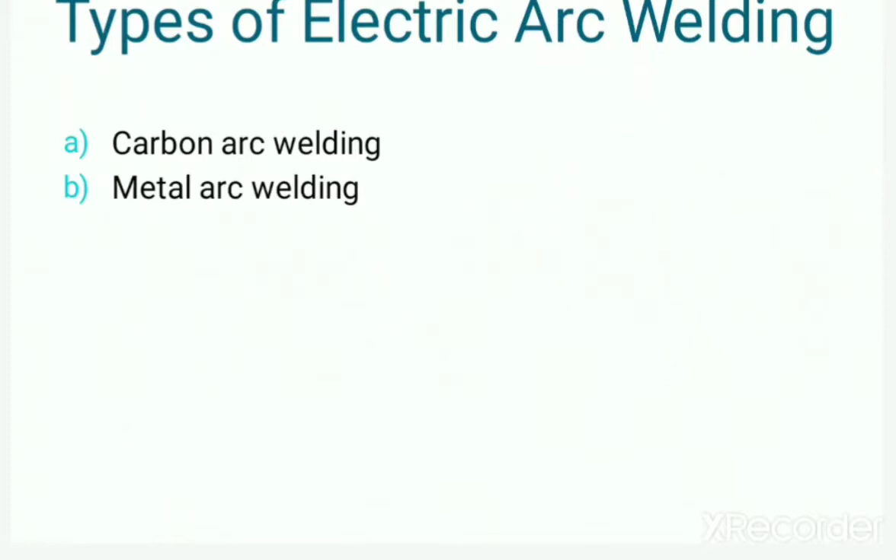Now in between the metal and the electrode, this arc is produced. That is what we are talking about, that an arc is produced either between the electrode and the metal piece you have to weld, or between two electrodes. Here the arc is developed between the electrode and the base metal which you are welding.

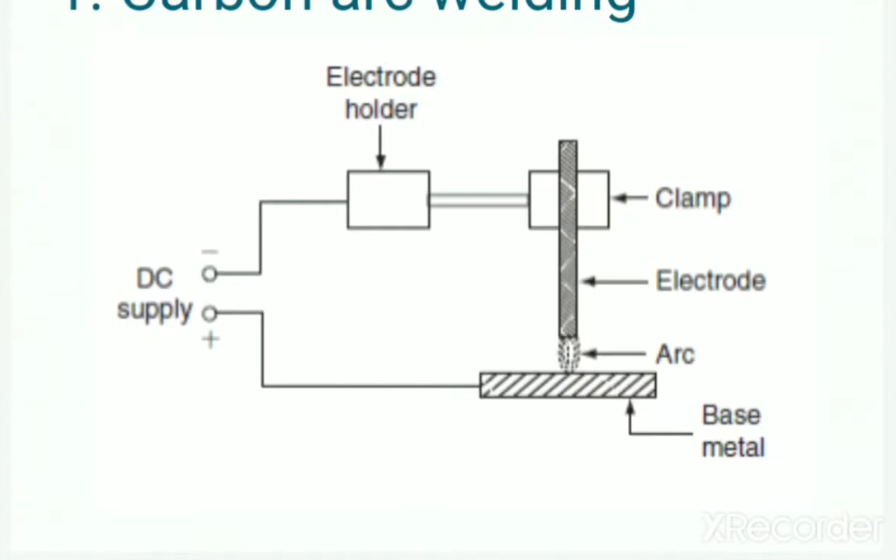When the arc is produced, it will melt the base metal, the electrode will also get melted and will spread over the base metal uniformly, because it is in liquid form, and once it gets cooled after the arc is removed, it will make the base metal much stronger, and the welding is done accordingly.

Now in carbon arc welding we can do the welding in two ways, for lighter metals and for heavier welding. If we are doing heavy welding, the size of the electrode is around 25 mm diameter and the current is around 800 ampere. Whereas if we are doing very light welding, the size of the electrode is only 10 mm, and the current is only 300 to 400 ampere.

Because the heat produced is very high, this kind of welding is used for copper welding, as copper has a very high thermal conductivity. So remember this, just because copper has a very high thermal conductivity, normally carbon arc welding is used for copper welding. We have already learned this in the last lecture also.

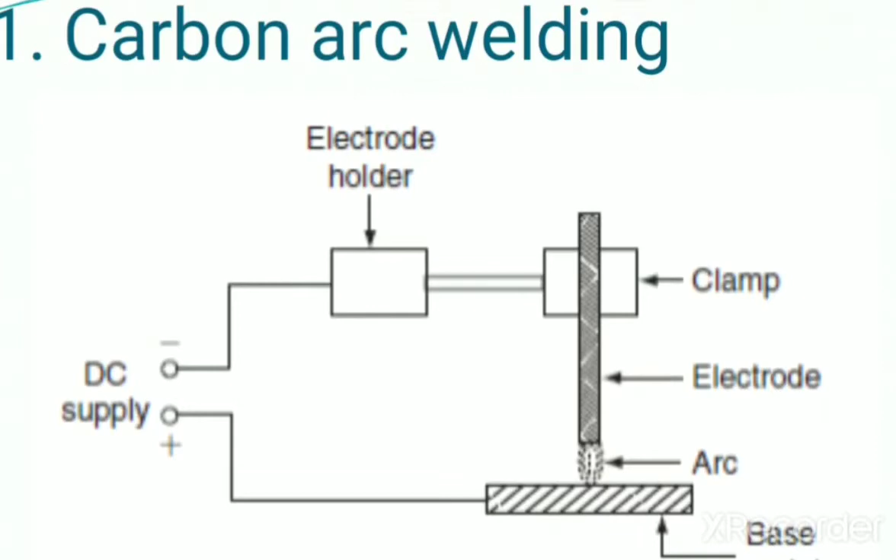Now next is metal arc welding. See, the process is the same. In metal arc welding, you can see here either we can use an AC supply or a DC supply. That depends on what kind of material you are using to weld. Clear? Now see, again here is an electrode holder.

This electrode holder is holding the electrode. There is a deposited metal also, always remember. And a flux coated metal electrode is here. This is the base metal or workpiece, where you have to weld. So this is the metal which you have to weld.

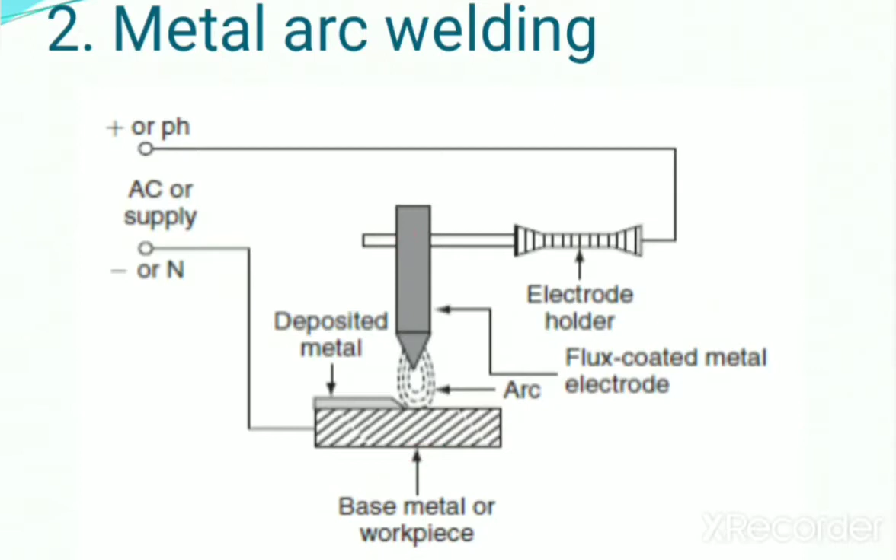Now when an arc is produced in between the electrode and the metal piece, what is going to happen? You can see the deposited material is here. So what will happen? As an arc is produced, this metal will definitely melt, and this will spread over the workpiece which you have to weld.

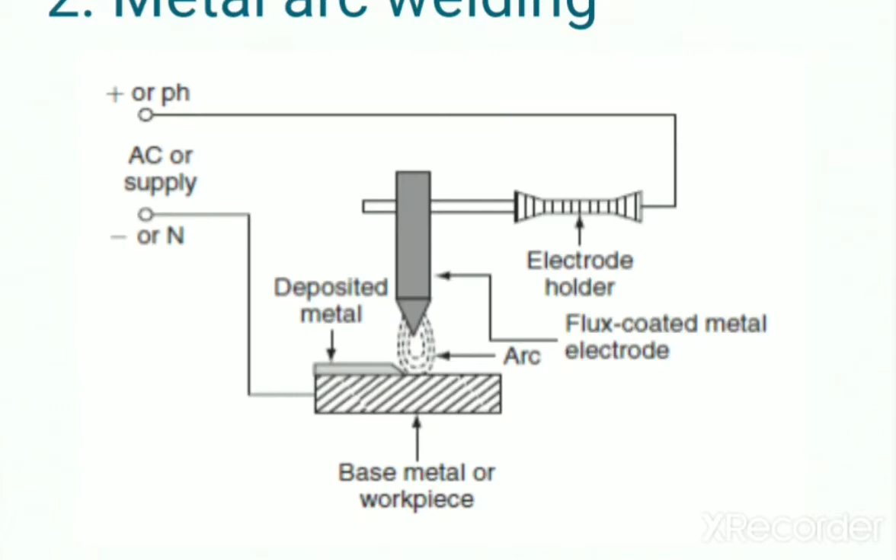So this deposited metal will help in doing the welding, and the electrode is helping in producing an arc. Okay, so this is all about metal arc welding. Metal arc welding is further subdivided into two parts: bare metal arc welding and coated metal or shielded metal arc welding.

In case of bare metal arc welding, I just want to tell you one thing: the welding is open to atmosphere. That means the metal which you are welding is open to atmosphere. So when you are welding, it is open to oxidation or nitrogen, meaning nitrides will be formed, and sometimes this does not make the welding very proper, and the strength is also reduced in such kind of welding.

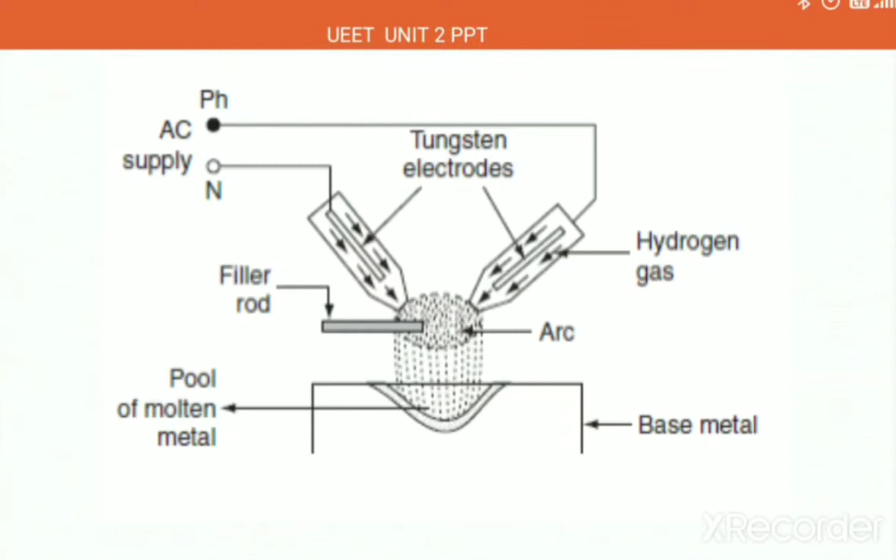Now a filler material is there, as you can see. This filler rod will be kept on the arc, and this will actually melt. This is the pool of molten metal, that means the metal which is in the form of liquid is filled here, and we call it a pool of molten metal. This is the base metal which you have to weld. An arc is produced here. This filler rod will get melted, and it will make the welding proper.

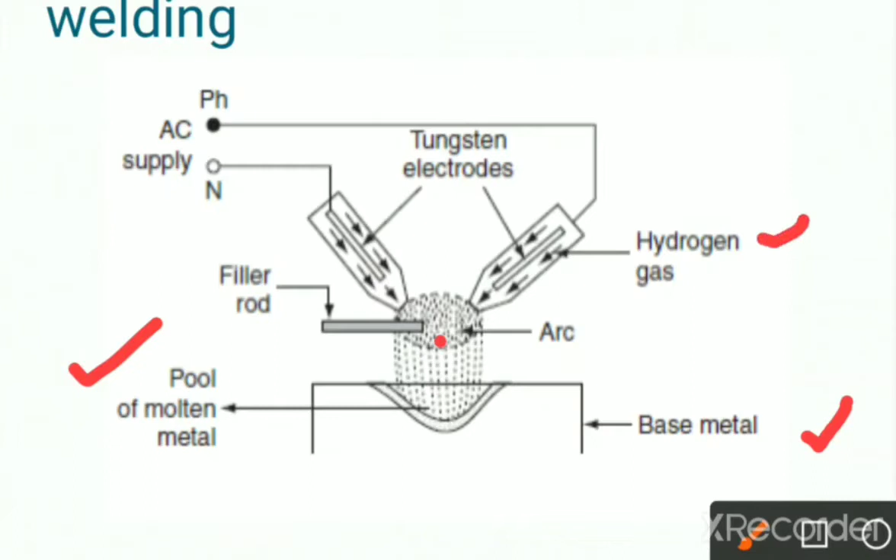But always remember, the atmosphere that we are using is hydrogen gas in case of atomic hydrogen arc welding. Next comes inert gas metal arc welding. The supply may be AC or DC, and the inert gases we normally use are helium or argon.

In case of inert gas metal arc welding, you can see the arc flame which is produced here. Again, there is a molten metal and there is a base metal. You can see that this nozzle is kept here, which is supplying the inert gas to the portion where the arc is produced. We can give AC supply or DC supply.

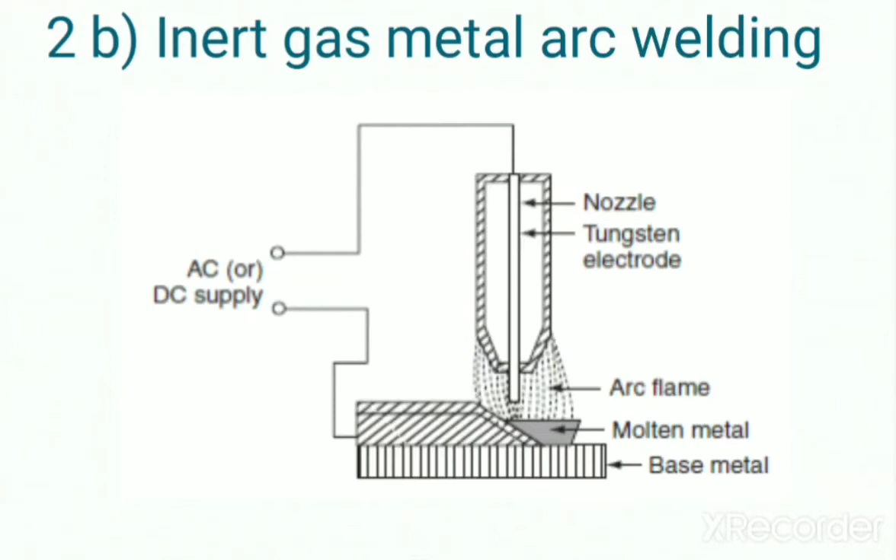When the arc is produced here, this particular metal will become liquid. It will spread over the base metal to make the welding proper. So this is how inert gas metal arc welding is done. The electrode is actually helping in welding this. In some cases the electrode itself gets melted, and sometimes we use a particular metal that gets melted for the purpose of welding.

Now next is submerged arc welding. As you can see here, the electrode is submerged in flux. This flux may be made of carbon or some other material, and it may be in powdered form. It gets melted when it comes near the arc. Again, a molten metal is there.

Molten metal means the flux, when it comes in contact with the arc produced with the help of this electrode, actually gets melted. This flux gets melted and it is in the form of bluster. We have submerged the arc in the flux.

Okay, and this is the parent metal. You can see this parent metal is actually the main metal which you have to weld. So when a molten metal is coming here, you will do the welding accordingly. Submerged arc welding means you have submerged the arc in a particular material, and here that particular material is flux material, so you are using flux here.

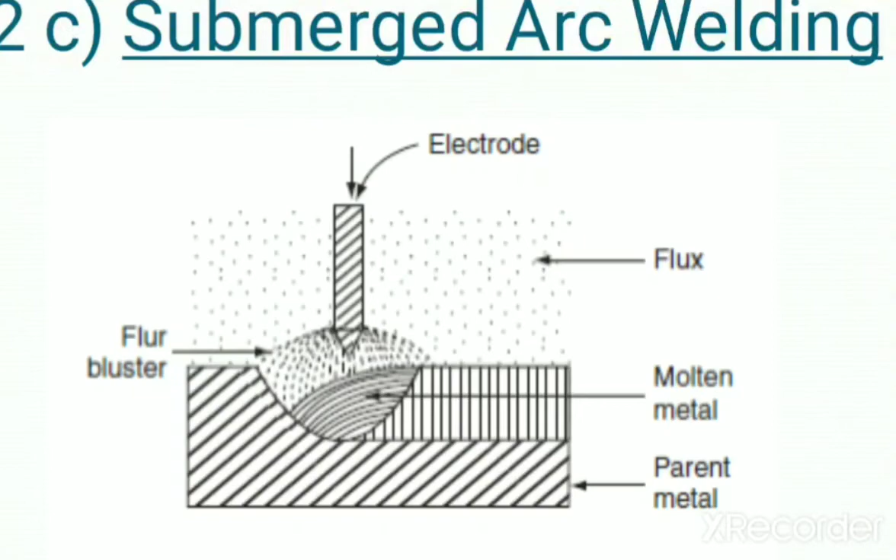Next comes electron beam welding. This is the other type of welding, the last type of electric welding. After that we will deal with different types of materials and a few more points. Electron beam welding is again similar to unit 1, electron bombardment heating. We have already dealt with what electron bombardment heating is.

Now you can see here, in case of electron beam welding, a DC supply is here, an HVDC supply is given to this particular area from where the electrons will flow. A vacuum pump is created, a cathode is there, which is actually an electron emitting heating element. That means when we give an HVDC supply with the help of DC supply to the filament, what is going to happen? This particular wire, the cathode, will get heated. When it starts heating, it produces some electrons.

These electrons, you can see those dotted lines, they all move towards the electromagnet. When the electrons start emitting, what is going to happen? We have used an electromagnetic focusing lens. If any electron comes in contact with this focusing lens, or if it is scattered here, these focusing lenses actually focus it on a particular point where you have to weld it. For example, this is where you have to weld it.

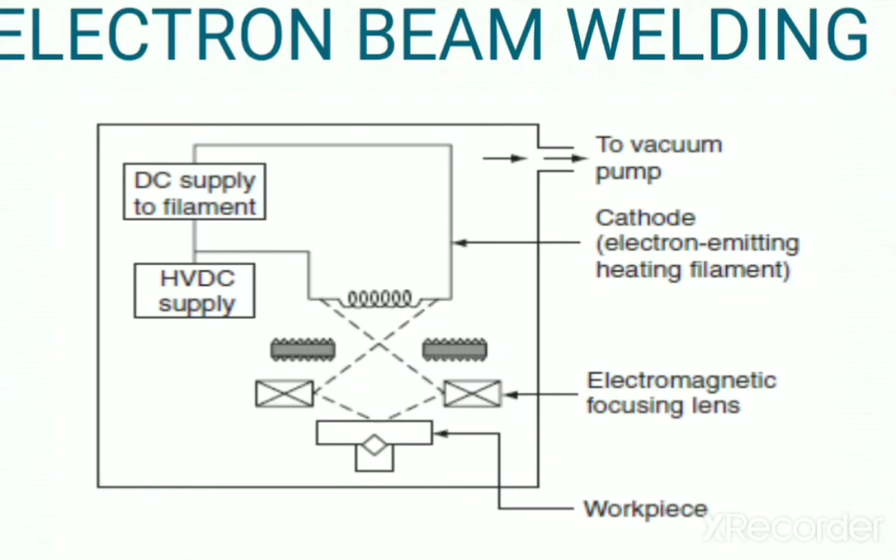This is a workpiece, and these electromagnetic focusing lenses are connected in such a way that when electrons come in contact with them, they actually reflect back to a particular point. And this is how electron beam welding works. This whole process is done under a vacuum.

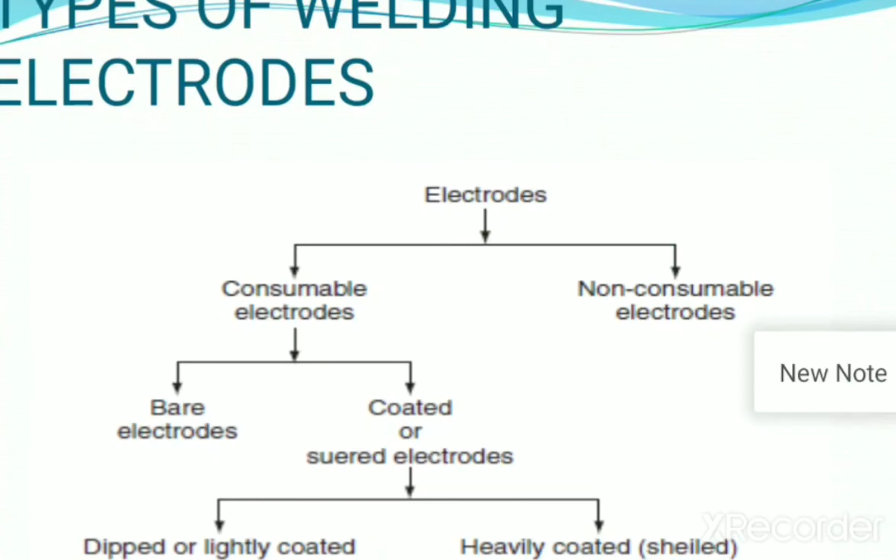Okay, now besides this welding, let's see how many types of welding electrodes there are. There are two types of welding electrodes. The first one is consumable welding electrode, and the second one is non-consumable welding electrode. So what do consumable and non-consumable welding electrodes mean? First of all, let's come to non-consumable, because they are not further subdivided.

Non-consumable welding electrodes are those which are not consumed during the welding process. That means when the welding process is going on, electrodes are just helping in doing the welding. They do not get consumed, so they are non-consumable. Examples of non-consumable electrodes are carbon, graphite and tungsten, because these do not get consumed during welding. Now let's come to consumable electrodes.

Consumable electrodes are further subdivided into two parts: the bare electrodes and the coated electrodes. We have already dealt with all these things. Consumable electrode means the electrodes which get consumed, that means they get melted while doing the welding process. And we have already seen that in case of resistance welding, the electrodes do not get consumed, whereas in case of arc welding, the electrodes are getting consumed.

Bare electrodes are those electrodes which are not covered with, or have no layering of anything over them, whereas coated electrodes get a layer of some other materials. When we are using consumable electrodes, always remember that these electrodes have a length of about 200 to 500 mm, and their diameter is about 2 to 8 mm.